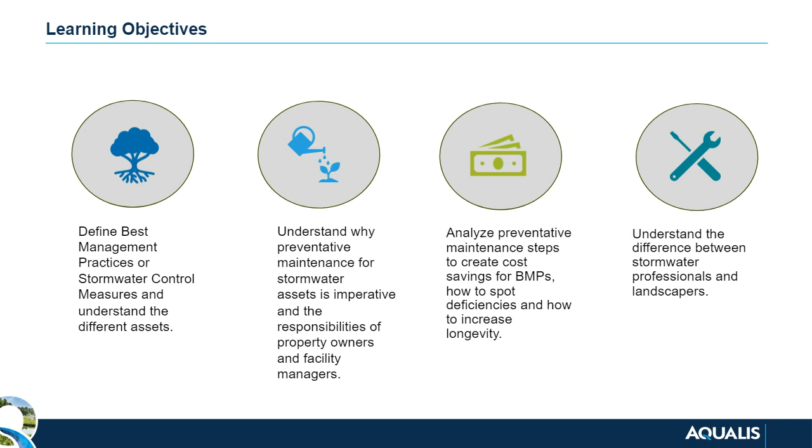Thank you, Michelle, and thank you everyone for joining us today to learn more about managing your stormwater assets. We have four key learning objectives for today's presentation. First, you will become familiar with multiple stormwater assets, both above and below ground, as well as green infrastructure. You will have a better understanding of what proper maintenance looks like for these assets and how to preserve them. You will also be able to identify issues and deficiencies in order to get ahead of system failure and costly repairs. Finally, you will understand not only why preventative maintenance is important, but why stormwater professionals are the most qualified to protect your stormwater assets.

First, let's review the basics of a stormwater system. Stormwater systems exist on every developed property greater than one acre or more to manage stormwater runoff. As we have urbanized more land, concrete, asphalt, and other impervious surfaces are common. Since these surfaces cannot absorb rainwater, runoff is diverted elsewhere until it either enters groundwater or reaches another body of water. On this journey downstream, stormwater collects pollutants, debris, and trash that is carried to our waters. Stormwater systems not only help reduce flooding and erosion events, but are also required to combat pollution.

These stormwater control measures are typically called Best Management Practices, or BMPs. BMPs can look very different and have a range of functions, but all are intended to treat, reduce, or prevent stormwater pollution. Please note you will hear me refer to stormwater assets as both SCMs and BMPs throughout this presentation.

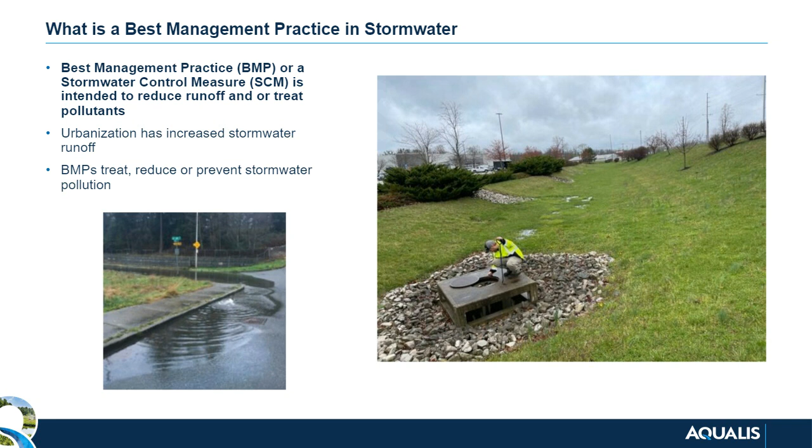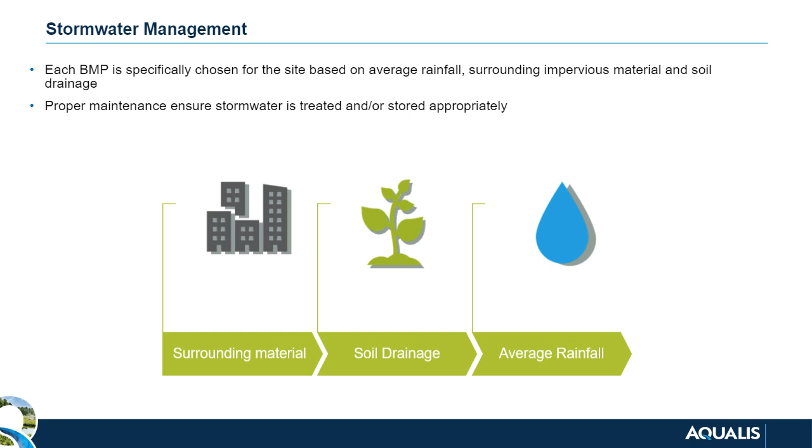As mentioned previously, all development that disturbs an acre or more is required to have a stormwater system. The BMPs implemented are specifically designed to efficiently manage stormwater on your property. Every stormwater system looks different, as engineers consider rainfall, impervious material, and the type of soil present on each property.

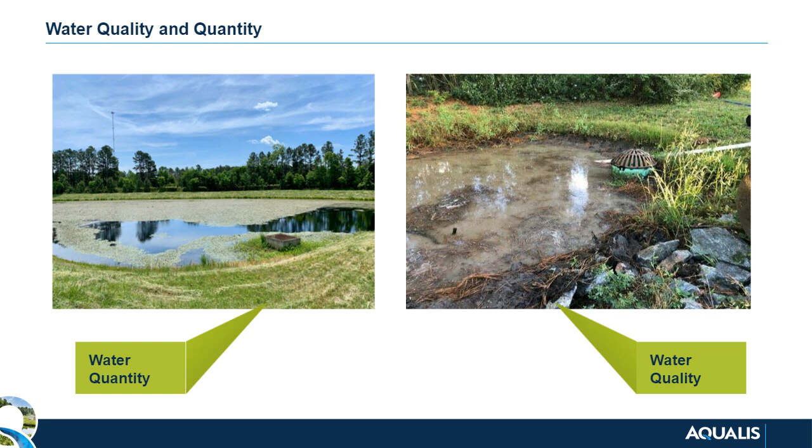Water quantity SCMs manage the volume of water stored in and leaving the site. Water quality BMPs filter stormwater by imitating natural processes, utilizing sand, roots, or vegetation to filter out trash, debris, and pollutants as the stormwater is absorbed into the ground or carried downstream through underground drains.

There are two different types of stormwater infrastructure systems, gray and green, that can be identified on most properties. Gray stormwater systems were originally designed with the main focus of moving stormwater away from buildings as quickly as possible. These manufactured systems are typically comprised of concrete or metal structures, including underground pipes and storm drains, helping to coin the term gray infrastructure. Green stormwater infrastructure, on the other hand, utilizes porous materials, including soil, vegetation, and permeable pavement

to mimic the natural hydrologic cycle of a site. These systems are designed to capture the first flush of stormwater, which is often the most polluted stormwater runoff. By utilizing vegetation and natural processes, green stormwater infrastructure offers ecosystem services including wildlife habitat, pollinator rest stops, groundwater recharge, biodiversity expansion, and more. This common use of greenery, including trees, grasses, and native vegetation, is what gives green stormwater infrastructure its name. However, not all GSI uses vegetation. Green stormwater infrastructure may also be referred to as low-impact developments, or LIDs, or nature-based stormwater strategies.

There's a large movement in cities and towns across the country to convert existing gray infrastructure to green stormwater infrastructure. Throughout this presentation, we will discuss different opportunities in which you can consider how you can convert your structures.

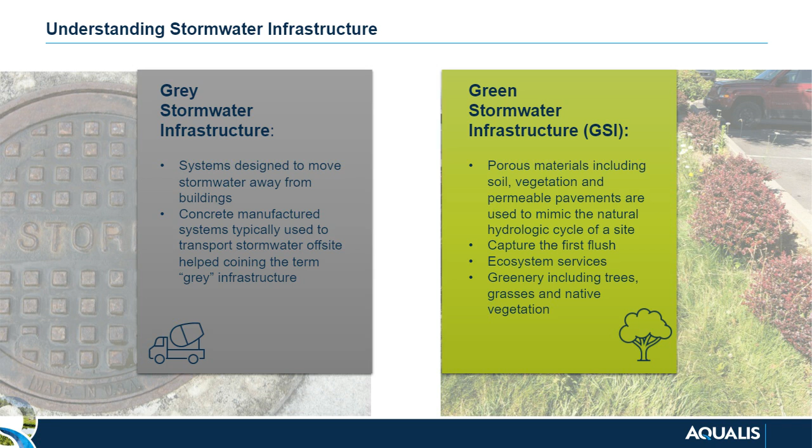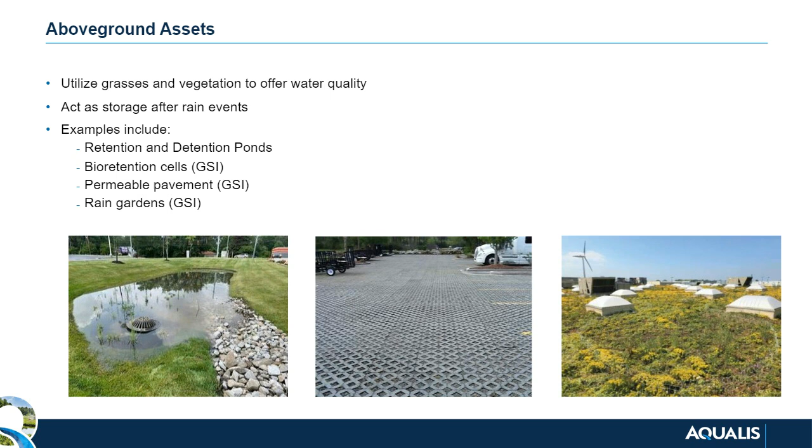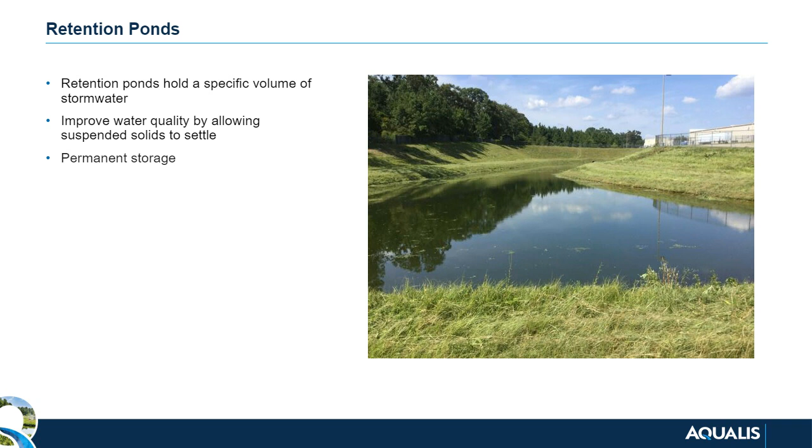Detention ponds are another example of an above-ground BMP. Detention ponds are not meant to hold stormwater permanently. They act as a fail-safe after rain events to temporarily store stormwater. These BMPs will drain stormwater and will be dry in about 72 hours after a rain event.

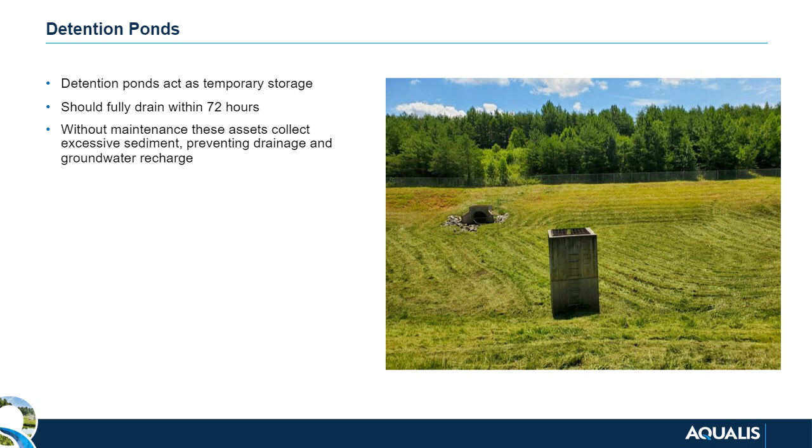Bioretention cells are landscape depressions that capture and treat the first flush of runoff from surrounding impermeable surfaces and then dry out between storms. These systems are different than a retention or a detention pond. They are typically found in parking lots or along roadways. These are not necessarily designed to hold water and have no special media to filter pollutants.

A site is a good candidate for bioretention cells if it has a decent-sized surface area that can be sacrificed for development of bioretention cells, has permeable soils that allow for infiltration, and for sites whose goal is to capture runoff from the first flush.

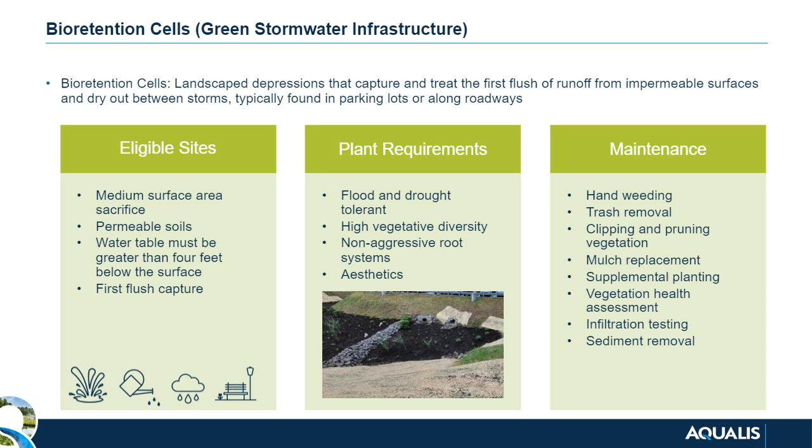Rain gardens are comprised of a collection of native vegetation planted in a small depression designed to temporarily hold and slowly infiltrate stormwater runoff. Your site would be a good contender for a rain garden development if there is the ability to sacrifice a small area for the garden's construction, the soil is permeable to allow infiltration, it is a non-wooded site as water could damage roots of surrounding trees,

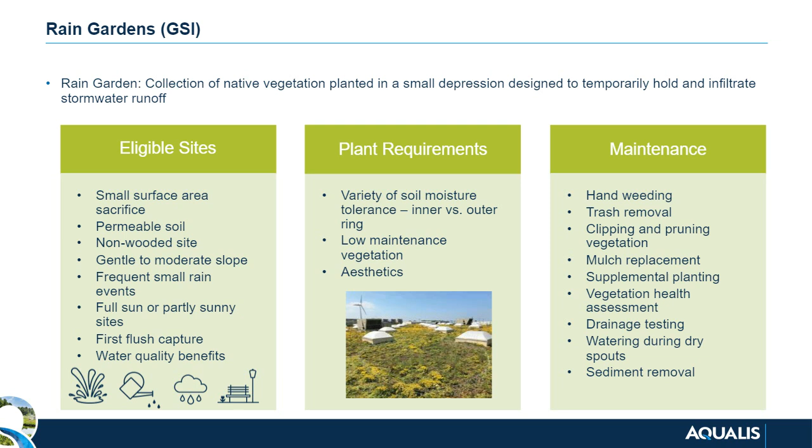There's a gentle to moderate slope. The site receives frequent small rain events, and it receives full to partial sun.

Finally, permeable or porous pavement is a pavement that is comprised of porous materials to allow stormwater runoff to be absorbed and held in subsurface stone reservoirs. Eligible sites do not need to sacrifice surface area, as permeable pavement is a traditional pavement alternative. Oftentimes, these sites are used in repaving parking lots. Not all permeable pavements have the capability to harbor plants, but grid-style permeable pavements can be planted with grass.

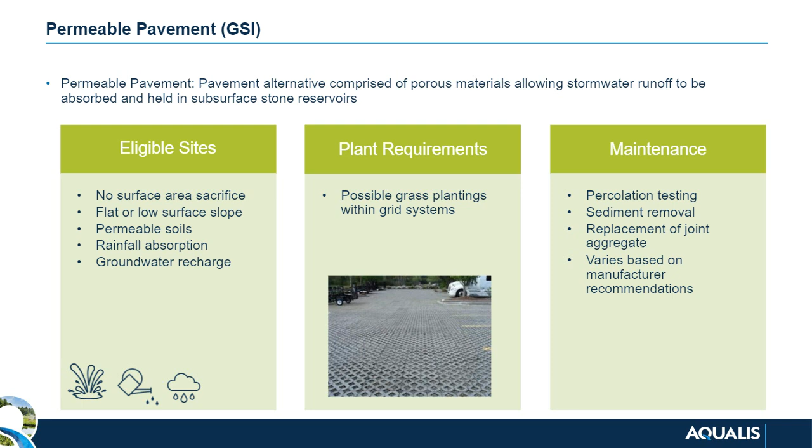There are also BMPs that function underground. They are often utilized in areas where land is less available or more expensive, such as larger metropolitan areas. Here you can see a stormwater vault and underground culverts. The vaults can store thousands of gallons of runoff, and much like the ponds from before, release the stormwater at a controlled rate to avoid overwhelming ecosystems and sewers. The culverts or pipes carry stormwater underground to either a treatment plant or to surface waters.

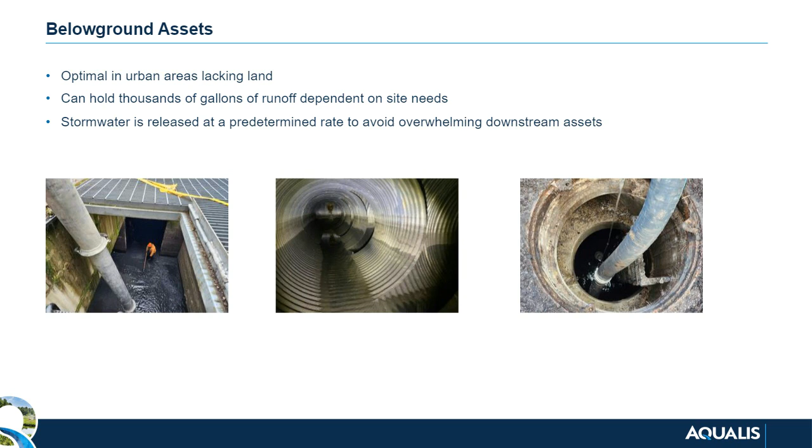Can be installed inside underground vaults to improve stormwater quality. Underground assets usually have small confined openings that cannot be entered without professional certifications and proper safety equipment. Trucks with vacuumation capabilities are required to maintain these sites. These vactor trucks can vacuum sludge out of vaults and use high-pressured water called jetting to clean them.

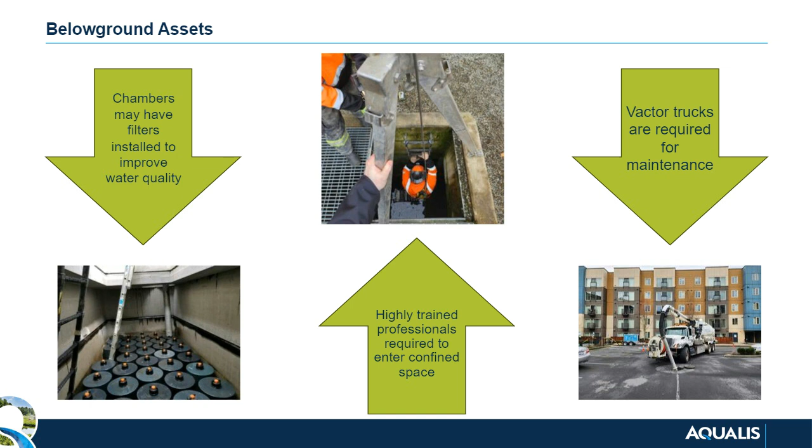As we move forward, we will talk about the importance of preventative maintenance in order to maintain the functionality and compliance of your stormwater structures.

Water compliance is not optional. The Clean Water Act establishes the basic structure for regulating discharges of pollutants into the waters of the U.S. and regulating quality standards for surface waters. Under the CWA, EPA has also developed national water quality criteria recommendations for pollutants in surface waters.

Lack of proper maintenance may lead to a notice of violation and associated fines in your system if your system is inspected and found non-compliant. Cities and states have the authority to inspect your property and may issue NOVs and fines to property owners.

Stormwater systems act as a line of defense against pollution in our waters. Properly maintaining BMPs allows them to function as intended and reduces non-point pollution. Properly maintaining your system also prevents premature failure. Small issues can be caught early when your system is regularly maintained and immediately repaired, avoiding failures.

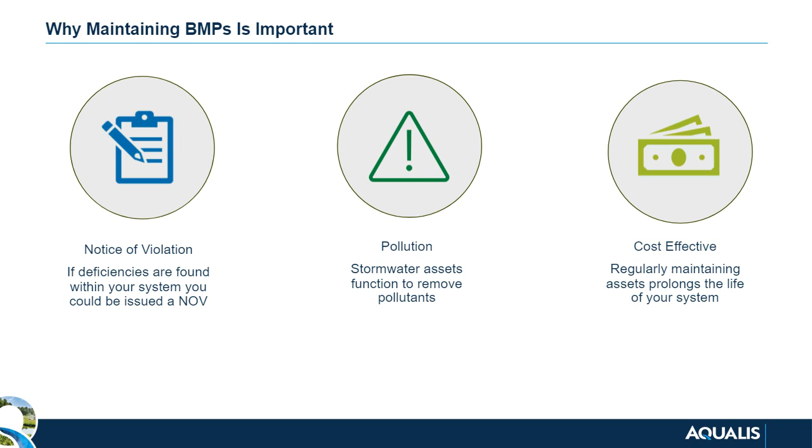While some out-of-scope work may be required for every stormwater system at some point in its life due to an extreme weather event, aging infrastructure, or required system updates, many repairs and rehabilitations are preventable with routine maintenance. The main reason these systems do not receive the maintenance and attention they require is due to the run-to-fail maintenance method. And I use the term maintenance lightly.

The run-to-fail method occurs when systems are left to operate without proper maintenance until a failure occurs and action is required to resume function. Property managers often fall victim to this method knowingly or unknowingly due to the out-of-sight, out-of-mind mentality, or generally lack awareness of the systems and their needs.

The out-of-sight, out-of-mind mentality occurs when stormwater assets can be tucked behind buildings, hidden in parking lots, or are vegetated assets. If you aren't aware of bioswales, you would think it was designed as an aesthetic part of the property, but it is a system that requires proper maintenance.

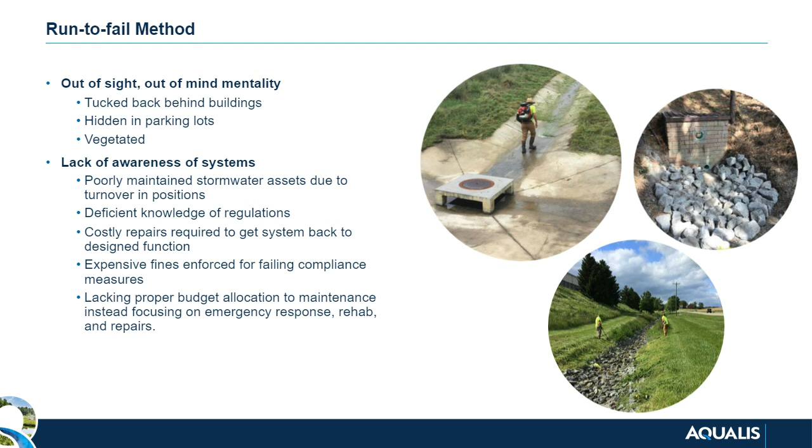Lack of awareness of these systems lead to poorly maintained stormwater assets due to turnover in positions, deficient knowledge of regulations, costly repairs in getting the system back to designed function, expensive fines enforced for failing compliance measures, and lacking proper budget allocation to maintenance instead focusing on emergency response, rehab, and repairs.

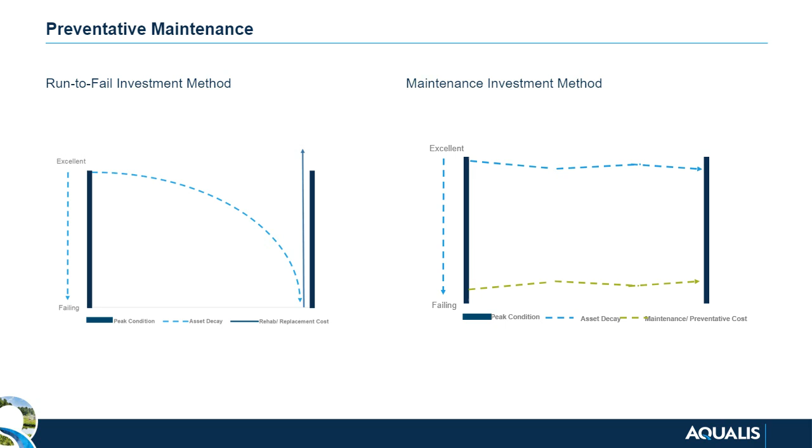Property owners are responsible for all stormwater that leaves their site. Regulatory expectations are set on a federal level and enforced at the local level. It is important to properly maintain this responsibility and avoid regulatory fines. To do this, property owners and facility managers must devise a preventative maintenance plan. A maintenance plan is often included in operation and maintenance agreements drafted at the sale of the property.

Regularly inspecting your stormwater system and BMPs will keep your property from being in violation of local and federal regulations. Inspecting your assets will also keep you aware of how they are functioning and if any repairs are necessary. If a repair is necessary, notify a stormwater professional immediately to avoid escalation of the issue and potential safety hazards. Partnering with a stormwater provider can save you time and energy as professionals can maintain and inspect your systems on your behalf.

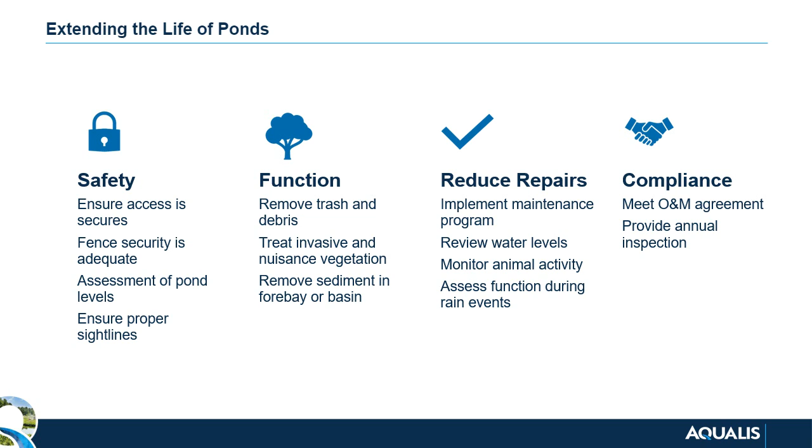Safety, functionality, cost and failure reduction, and compliance are the four main factors to keep in mind when putting together a preventative maintenance program.

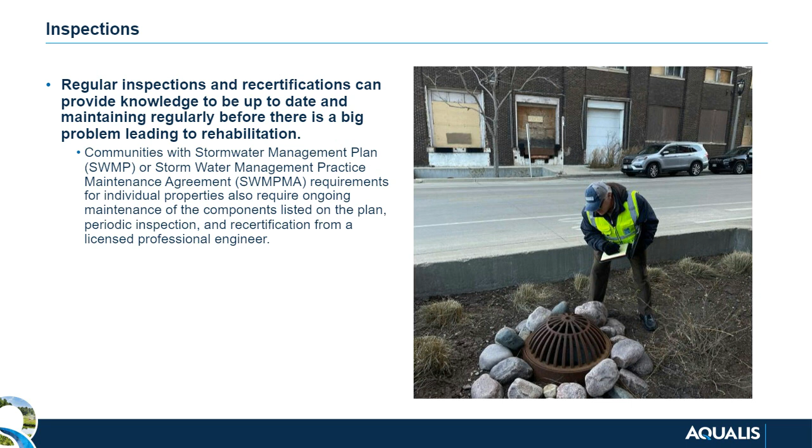Regular inspections of your stormwater assets ensure the system is functioning properly. Across the United States, expectations vary from monthly to yearly certifications that the assets are functioning properly. Even if inspections are not mandated by your municipality, routinely inspecting your stormwater system is highly encouraged. As I mentioned, the minimum required frequency can be found in the O&M agreement.

Routine maintenance includes an inspection of the entire system, structure cleaning and obstruction removal, vegetation management, sediment, trash, and debris management, deficiency escalation, and documentation and reporting.

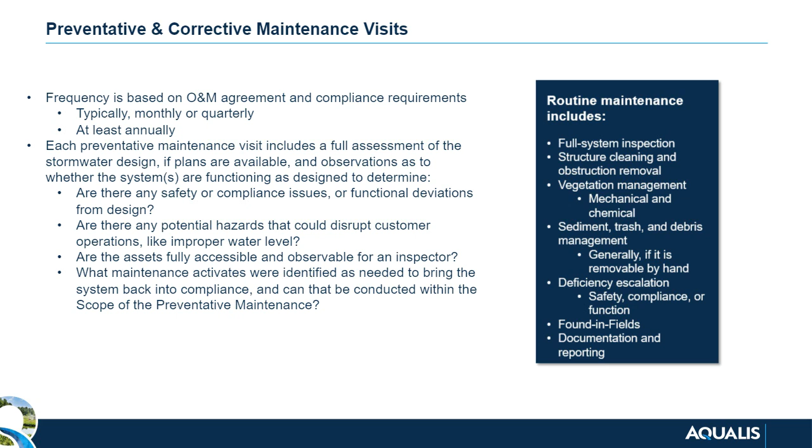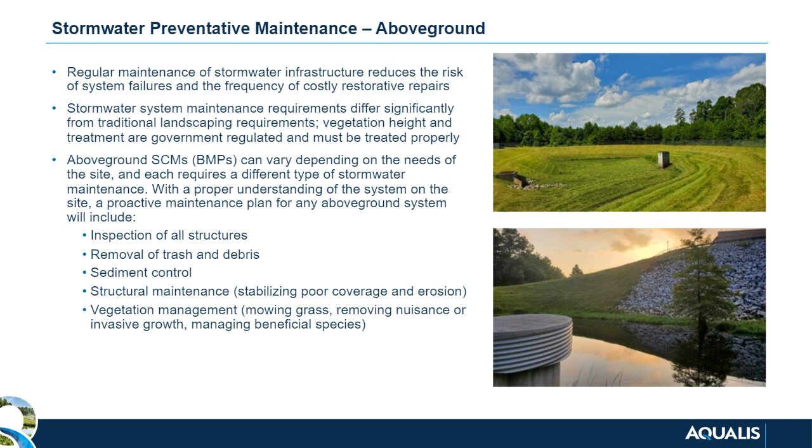Above ground SCMs or BMPs can vary depending on the needs of the site, and each requires a different type of stormwater maintenance. With a proper understanding of the system on the site, a proactive maintenance plan for above-ground systems will include inspection of all structures, removal of trash and debris, sediment control, structural maintenance, and vegetation management.

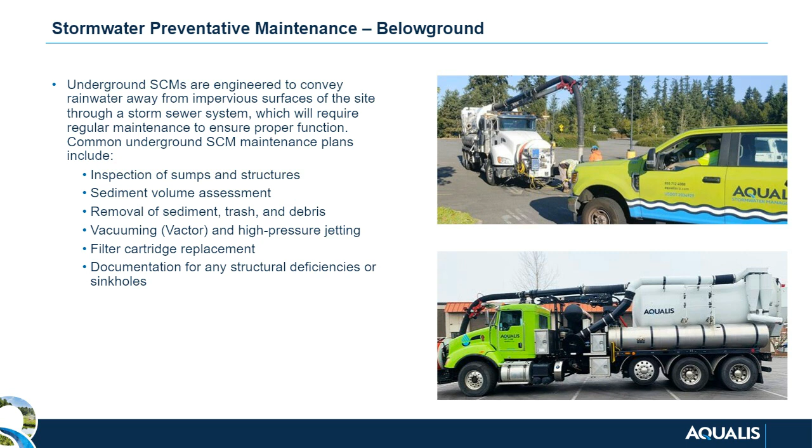Next, we will talk about what to do when your system is identified with deficiencies and repairs are needed.

Every water asset has an expected lifespan. Factors can influence the life of your assets, both positively and negatively. Maintaining your assets can prolong their life.

Some climates and regions are harsher on stormwater assets, which is why certain BMPs function better in hot or cold environments. Designs can also vary, and flaws in assets may develop over time.

Your stormwater assets are intended to be the most efficient for the system and property as a whole. As new technologies emerge, you may find another asset that could be a better fit for your system.

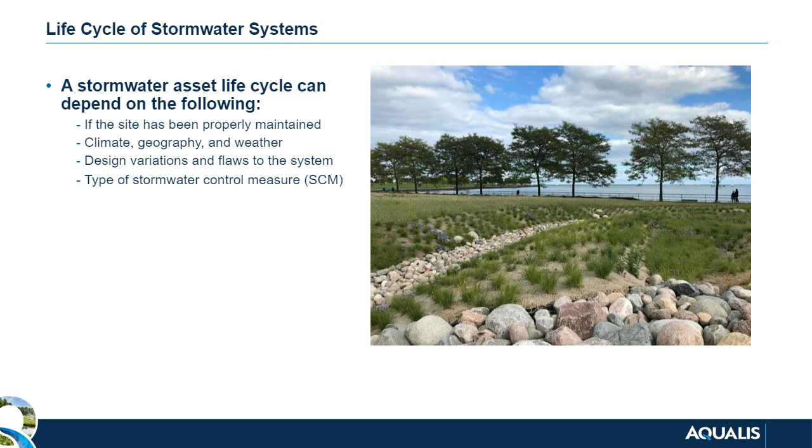As we talked about before, retention and detention ponds are intended to alleviate stress on downstream assets by storing stormwater. Regularly maintaining these assets will include practices that avoid failures that occur naturally.

Over time, grasses and vegetation grow, and without maintenance can become unruly, hindering the function of the pond. Trash and debris are brought to the pond by runoff and can clog outlets, which may lead to flooding of the area.

Erosion may begin in areas with poor vegetation cover or steep slopes where stormwater rushes, pulling loose sediment along. The sediment naturally accumulates at the bottom of these ponds, which may build up and limit the absorption process. All of these failures are kept at bay by regular maintenance.

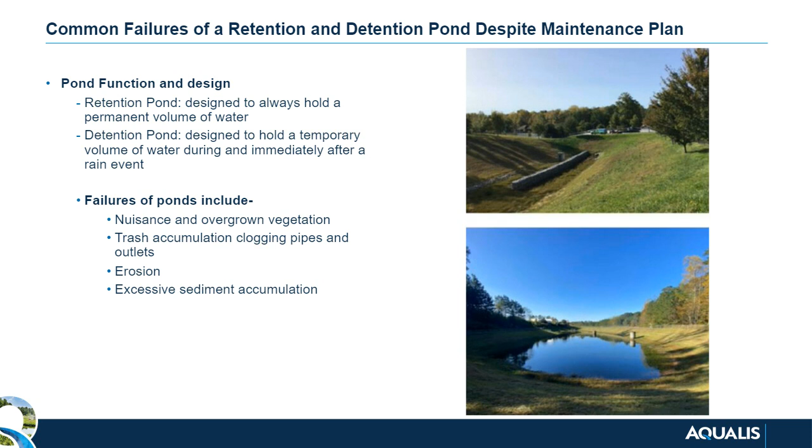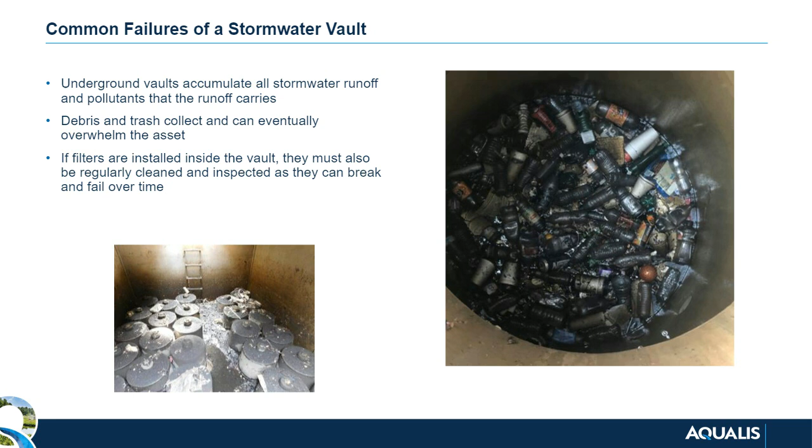Stormwater vaults are often neglected as they are out of sight and out of mind. Common failures include accumulation of sediment, debris, and trash that limit the asset from functioning as designed. Filters also need regular maintenance and will no longer improve water quality if neglected.

As you have heard, underground systems require different equipment to diagnose, treat, and inspect underground systems. Underground pipe inspection services: this technology can identify suspected pipe damages, operational obstructions like accumulation of debris, sediment, or root intrusion. Also, compromised systems with complete pipe collapse or serious defects can be detected.

For preventative purposes, pipeline condition can be verified to detect minor defects due to installation, assess overall pipe health, and ensure the life of the underground pipe.

Vactor services: utilizing high suction power, these trucks collect and remove large volumes of debris of both wet and dry solids. This can be used and applied with a light combo of jetting to clean catch basins or vaults to remove accumulated sediment.

Jetting services use high-pressure water to dislodge sediment, clean, and clear compressed buildup. This solution is environmentally friendly and highly effective to clean and maintain underground systems.

And preventative maintenance and inspection services: these are management programs to provide routine maintenance on a monthly, quarterly, or biannual schedule. This includes visual inspections, sediment measurement evaluation, small debris removal, and reporting any deficiency over time.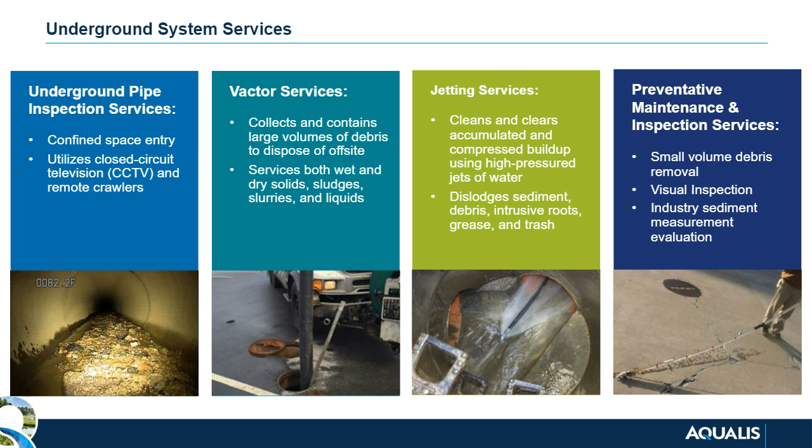Here's what a repair of an underground asset may look like. A site in New Jersey had an underground storage vault with filters installed. The vault was scheduled for routine maintenance where the Vactor truck would remove any built-up grime and sediment.

Once on site, stormwater professionals found the filters inside the vault had not been replaced in over a decade and were no longer functioning properly. Once the vault was vacuumed and jetted, the cartridges were replaced so the stormwater could be filtered and the vault could once again function as designed.

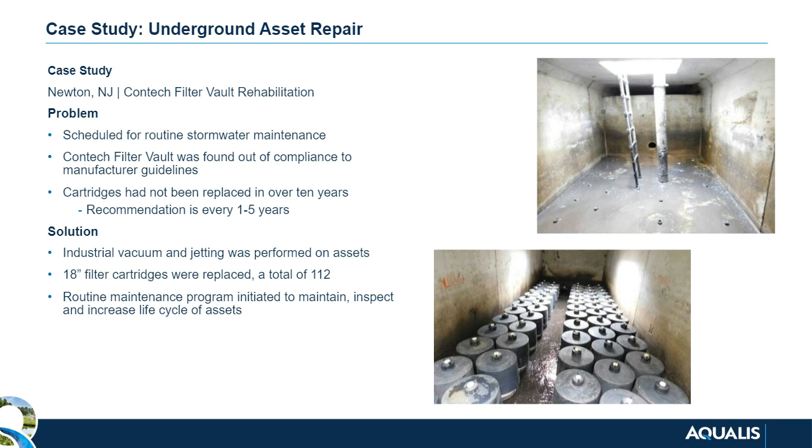Another concern with failing stormwater assets is erosion. Rapid water flow pulls loose sediment with it, leaving the sediment displaced and often flowing into a BMP. While many BMPs function to remove sediment from water, the sediment can clog up the naturally occurring filtration. The sediment buildup must be removed for BMPs to function properly.

This can be done by regrading a detention pond, dredging a retention pond, or vactoring a stormwater vault.

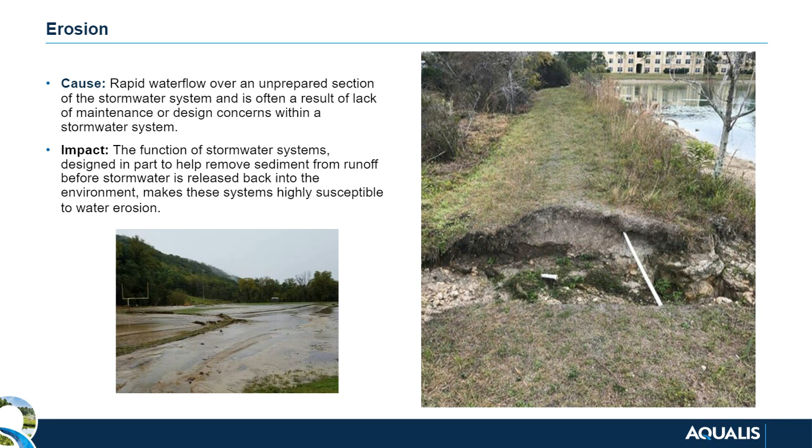To prevent erosion from occurring, it is important to stabilize the soil, most often done with vegetation. The vegetation around naturally occurring streams and creeks does just this. Many BMPs mimic this vegetation, called a buffer zone.

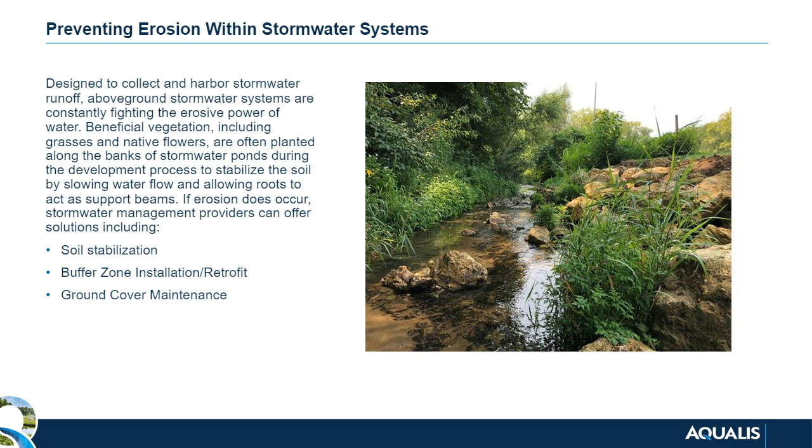Catch basins are one of the most common stormwater assets you will see across the United States. They reduce flooding by collecting stormwater, largely from parking lots and paved streets, and diverting it downstream. When examining a catch basin, stormwater professionals will look for potential repairs, functionality, safety, and compliance.

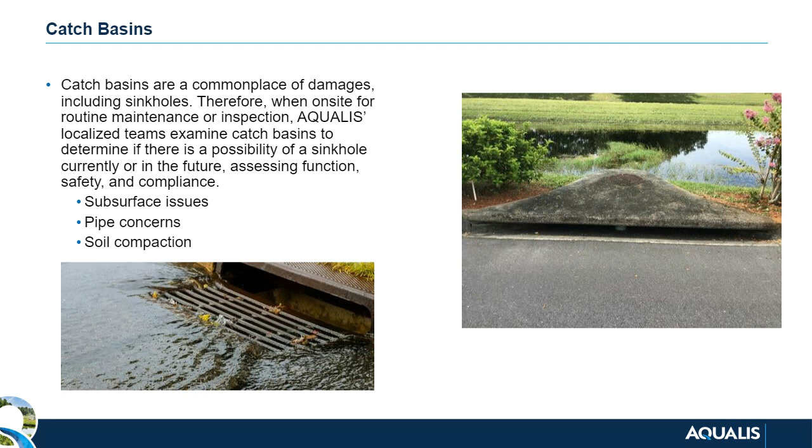The two common issues with catch basins are debris and trash accumulation, as well as structural failures. Normal wear and tear are expected, as these assets are the first line of defense in parking lots. A less common but more serious issue is sinkholes. To understand how sinkholes can be caused by catch basins, let's look inside.

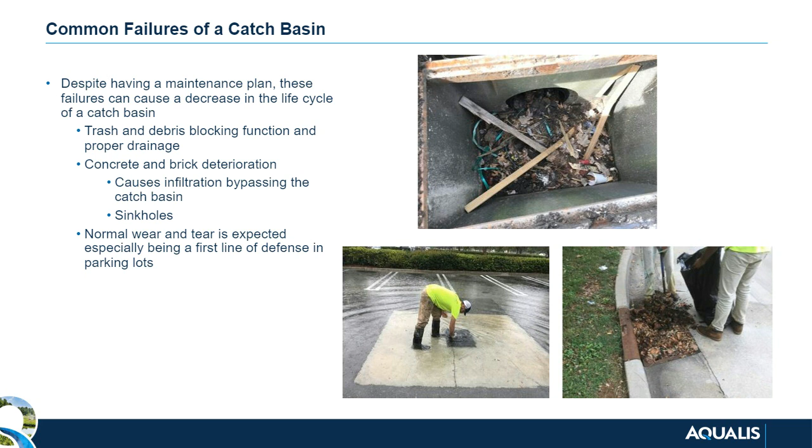Here's the inside of a catch basin. You can see where the frame sits, and below that is the riser. Risers can be made of various materials. Both concrete and brick are shown on this slide. Below the riser is the junction box and cover that connects the sewer system where stormwater is carried away.

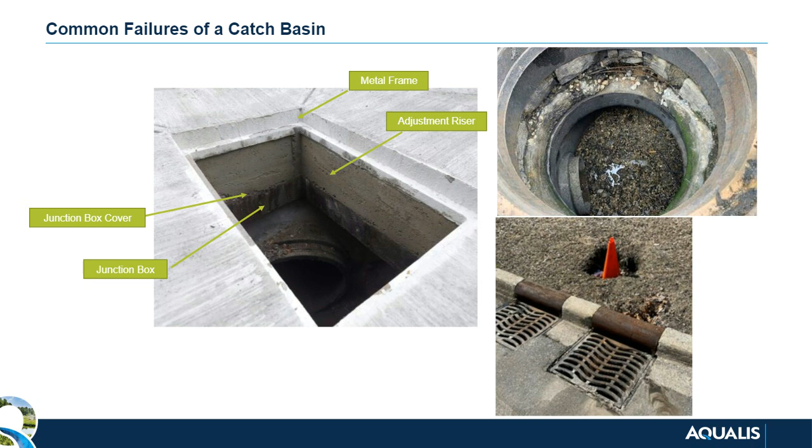In the top picture, you can see the riser is failing. As cracks and gaps occur, stormwater runs through these openings, further loosening the material and soil around the structure, leading to openings in the ground around the basins. If catch basins are left in disrepair, sinkholes may form, leading to a more serious matter and safety compliance issue.

As catch basins and underground pipes, commonly stormwater or wastewater pipes, begin to fail, cracks form and pull the ground around them inside the pipe, creating a cavity. The cavity under the surface can be much larger than the opening and the earth around the sinkhole, causing it to become loose.

For example, a sinkhole that appears small on the surface may not reveal the entire larger cavern underground. As a result, areas immediately surrounding the sinkhole could be destabilized and at risk of further collapse.

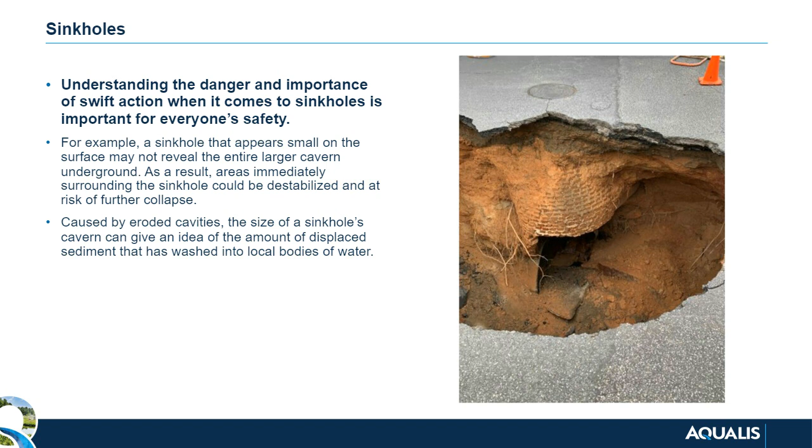Here is a case study of a sinkhole that occurred in Raleigh, North Carolina. This site had two large pipes running underground below a driving lane. The pipes became compromised and water was able to flow between the pipes and surrounding earth. The water mobilized the soil around it as it rushed into the pipe, leaving cavities behind. Eventually, the asphalt on top gave way, leaving the sinkholes open. To repair the damage, the pipes had to be resealed, and the cavity was filled behind the newly secured pipe.

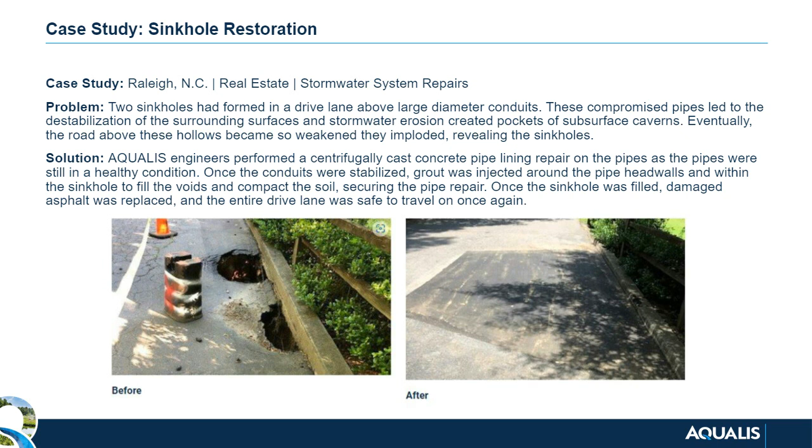As I mentioned previously, we often see landscapers in charge of stormwater assets. However, stormwater professionals are able to understand the vegetation requirements and identify deficiencies to keep you in compliance and to keep you, your employees, and your patrons safe when on property.

Stormwater maintenance looks different on every property. Proper maintenance of a stormwater system includes regular checks or inspections for signs of system deficiencies or failure. Stormwater professionals follow a similar order of operations at every site, starting with removing excess debris and trash that has accumulated. From there, they work around the pond, starting at a water line and moving up the slope.

This includes mowing, removing nuisance vegetation, or stabilizing areas with bare earth showing. Each visit, all stormwater assets are inspected to ensure they are functioning properly. The manner in which stormwater assets are maintained is essential to their health and longevity.

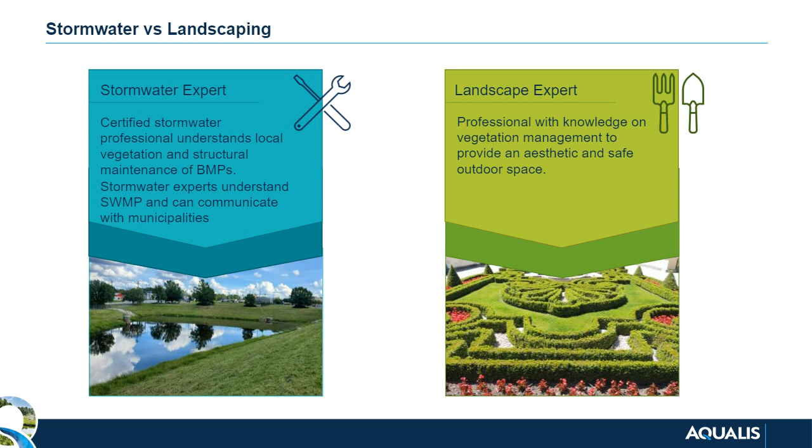Landscapers typically manage a property by removing weeds and nuisance vegetation for beautification purposes. Stormwater professionals are trained to understand local vegetation and how each plant is beneficial or harmful for drainage. These professionals understand how to read the original site plans and stormwater management protection plan, which documents each plant and where it was originally placed. Landscapers tend to treat all areas equally, whether a stormwater asset or not.

Maintenance, as well as repair and rehabilitation, should be a collective approach carried out in conjunction with a stormwater professional. Professionals understand the engineering, regulatory, and ecological issues impacting stormwater systems and can tailor solutions based on this criteria. Additionally, stormwater professionals will work with property owners to create, enact, and ensure a preventative maintenance program that meets the need of your SCMs and complies with federal, state, and local regulations.

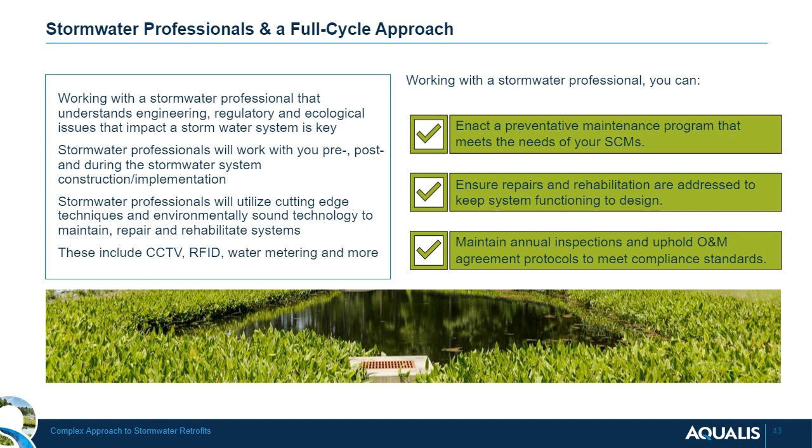If repairs or rehabilitation is needed, stormwater professionals will utilize a comprehensive and innovative approach to restore and maintain system functionality and uphold O&M agreements.

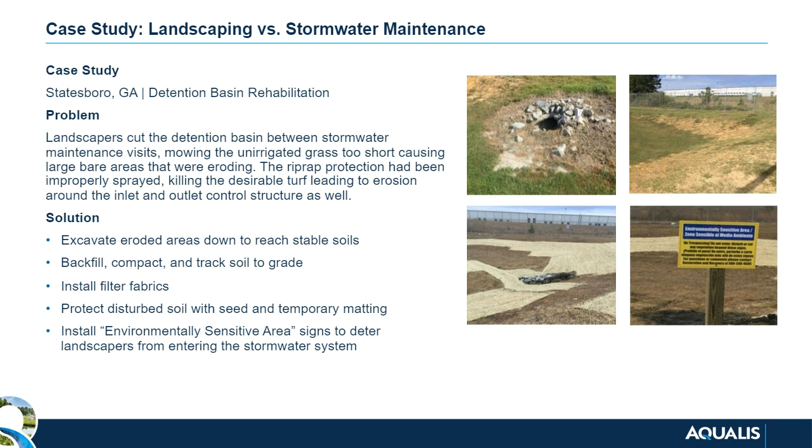The solution was to excavate eroded areas to reach stable soils, backfill, install filter fabrics to protect disturbed soil with seed and temporary matting, and finally install environmentally sensitive area or no-mow signs to deter landscapers from entering the stormwater system moving forward.

Stormwater professionals are crucial to ensure proper maintenance of stormwater assets. They go above and beyond removing trash and overgrowth. Stormwater professionals can inspect underground assets and confined spaces and test water quality. They know native and beneficial vegetation and how each species can come together in a system in a delicate balance. A stormwater professional will consult site plans to understand the property and site history, as well as where water will flow downstream. Properly managing stormwater assets includes specialized tools and certifications.

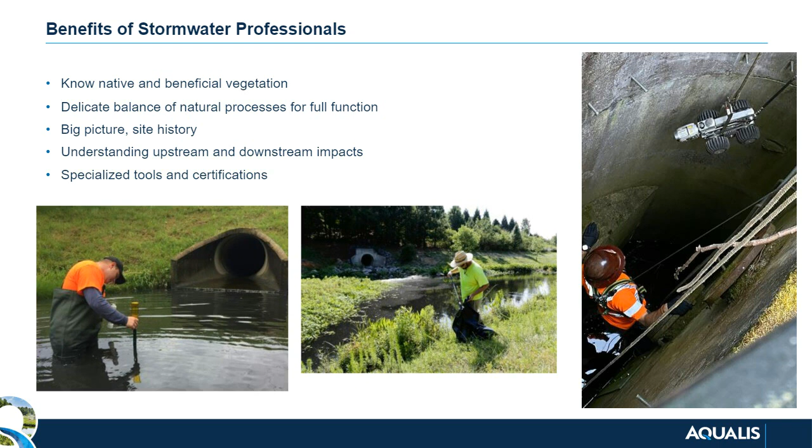Understanding your responsibility to maintain and inspect your assets is imperative in having a successful stormwater preventative maintenance program and reducing costs for your property, as you can also increase the longevity of your system with a proper maintenance program.

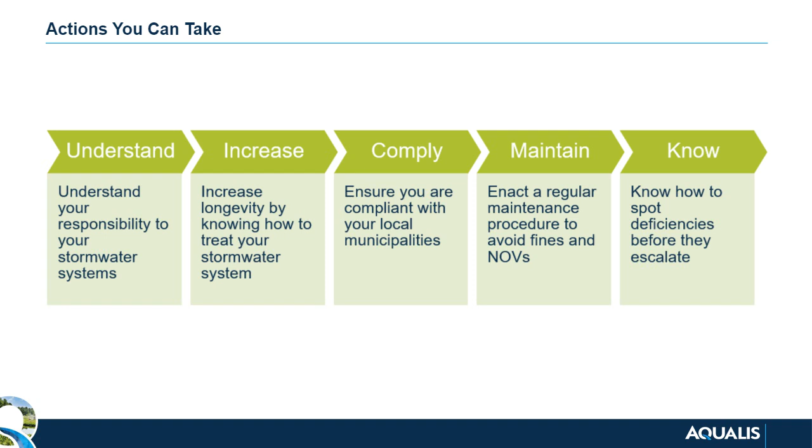So a little bit about Aqualis. Aqualis is the nationwide leader in sustainable water management services, including stormwater and wastewater engineering, stormwater and wastewater management, lift station management, hydro excavation, vactor and jetting services, underground pipe inspections, water quality testing, and emergency response services.

It is important to remember that water compliance is not optional. Avoid costly violations by complying with stormwater and wastewater rules and regulations at the federal, state, and local levels. Reduce your liability by properly maintaining your system. Improve your system performance and reduce the risk of flooding and backflow. And enhance your safety by conducting routine preventative maintenance services and corrective repairs to help prevent potential injury and damage.

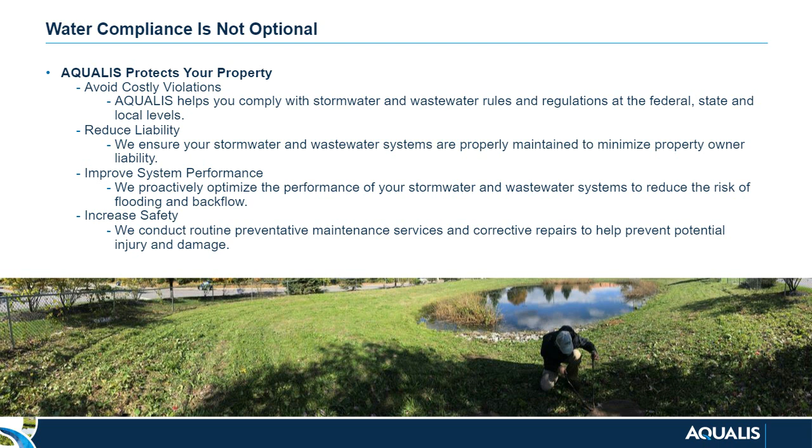No, I appreciate your time, and if you need support in your preventative maintenance program, or if a repair has come up, please reach out to Aqualis. We'd be happy to help.